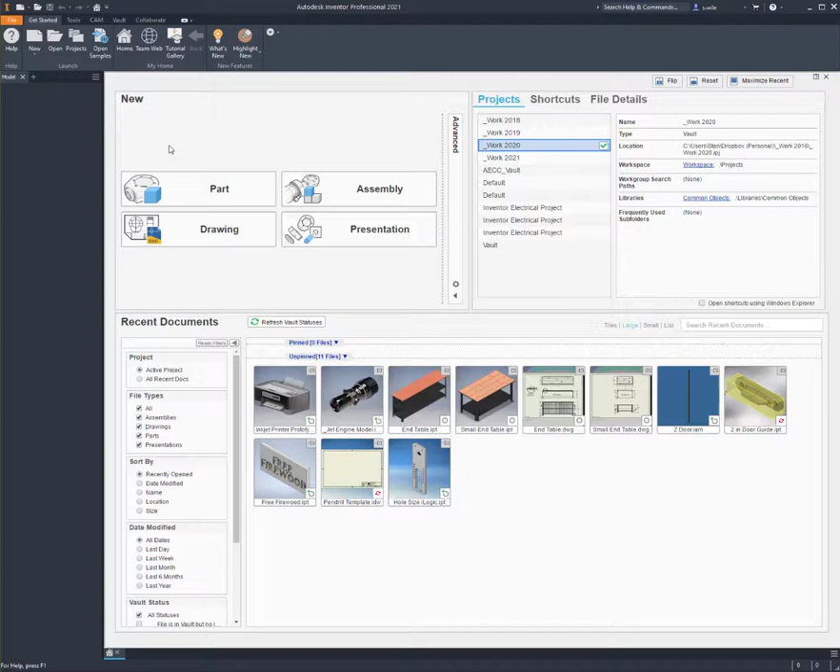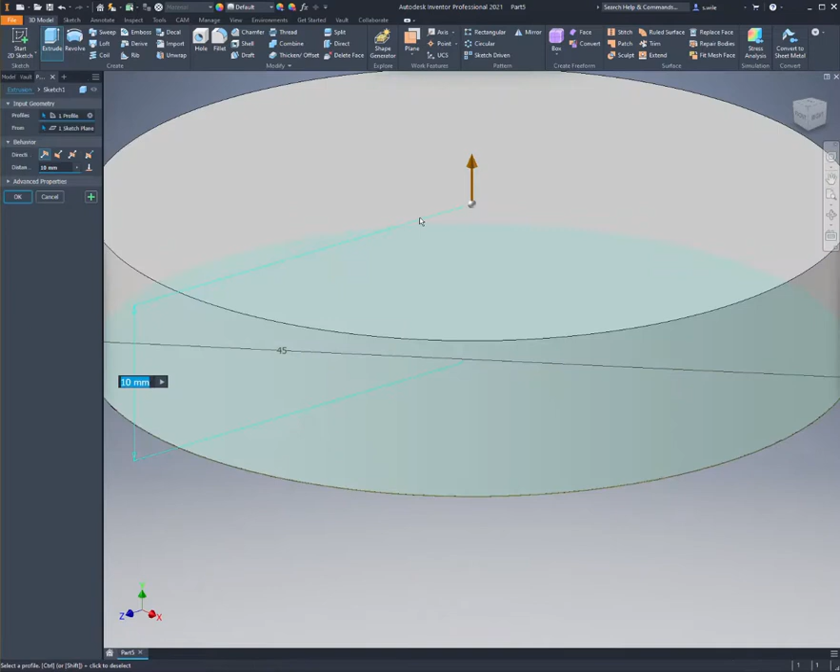We'll start with a metric part. And I'll start with the main hub as my base feature. It's 50. And then we'll do the little horseshoe clamp because it looks like it's on the same plane.

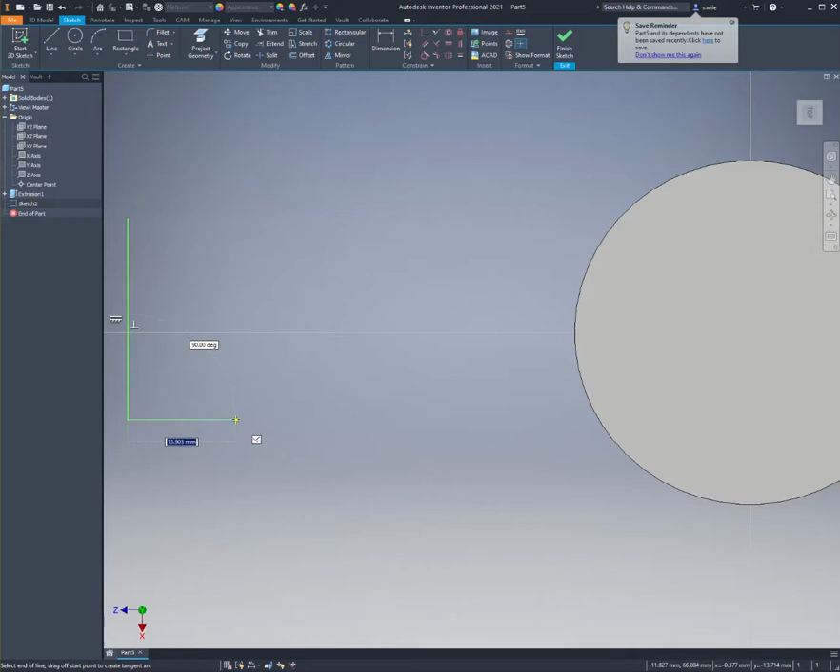I'll just do it as a line. A lot of ways you could do this. If you click and drag on an endpoint, the cursor turns gray when you click on it, and then that turns it into an arc. So this is 35, it looks like.

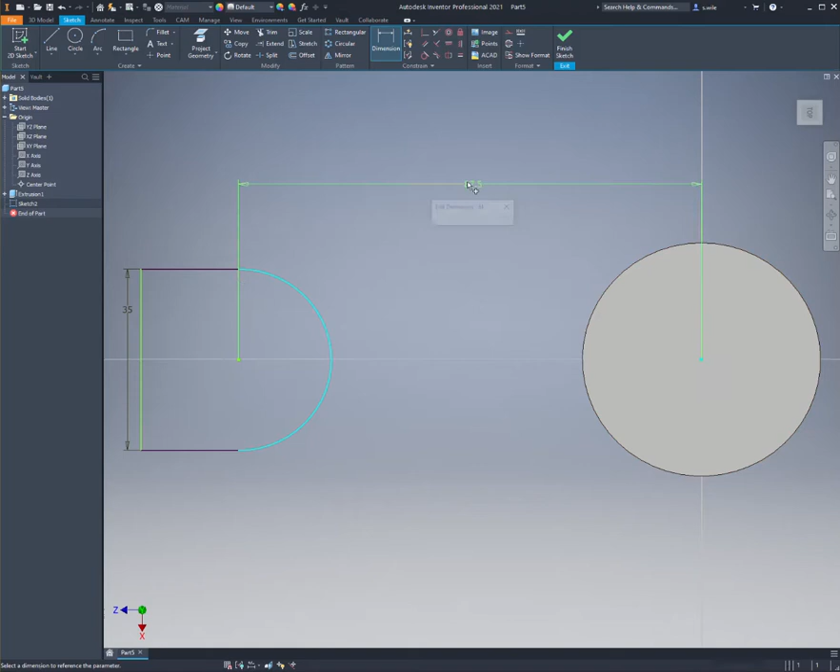I'm going to horizontally align these two and then set the spacing. And that is 20 high. And we'll put the holes in this, I guess, next. Let's fill in the rest of the body. So the piece that goes across the middle here looks like they give us a 35 off the top.

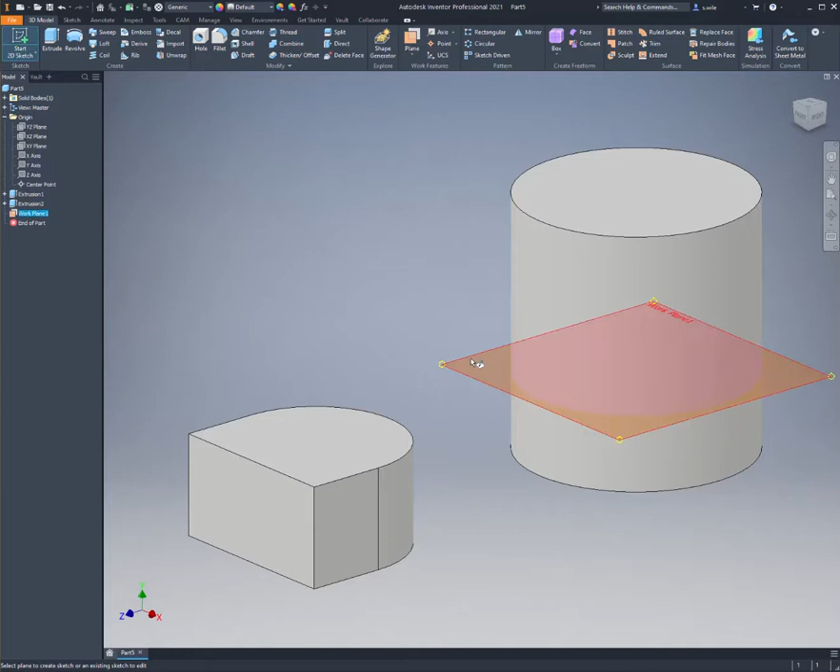So let's pull a work plane -35 and we'll put a sketch on that. And I'm just going to project cut edges here. And then F7 or this button will slice your graphics so you can see where you're working. And it looks like it just goes to the end to tangent.

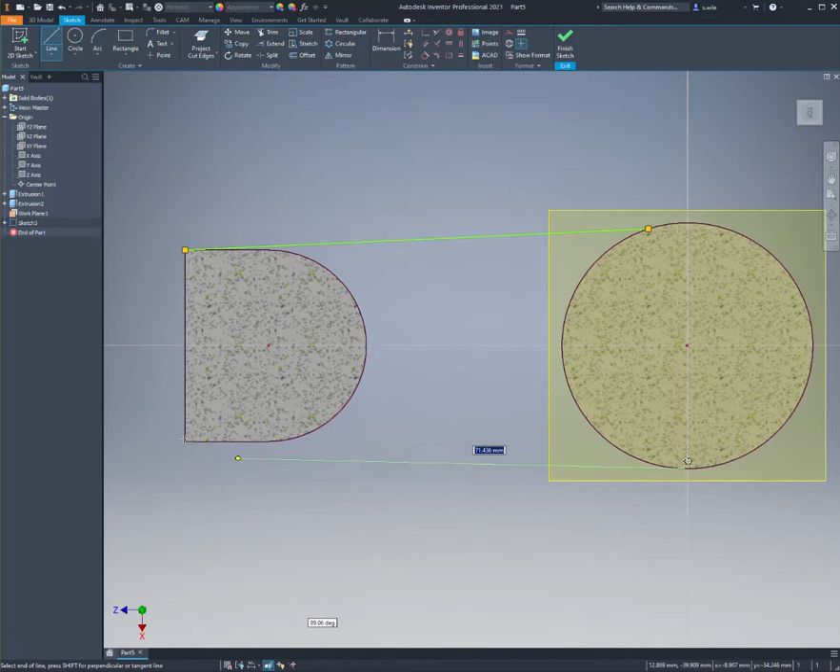And a little trick here, if you start on a circle, if you hold shift, it locks it to tangent. And something's wrong with my computer because it's jumping all over the place. But that gave me my tangency and my endpoint instead of having to come back and follow up with a tangent. That's a closed profile in the middle, so we can extrude that. That's going to go down 10.

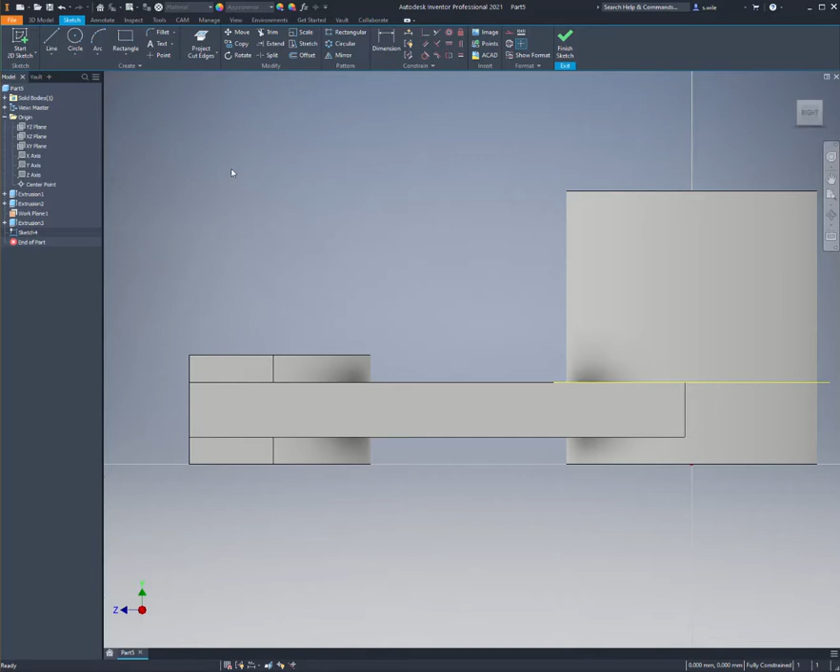I'll put the rib in the middle next. It looks like it's 1 millimeter off the top. So we'll put a sketch in the middle, and I don't think I'm going to project cut edges. I am going to slice my graphics. I think I'm just going to project that and that to pull off of. Let's go right to the top.

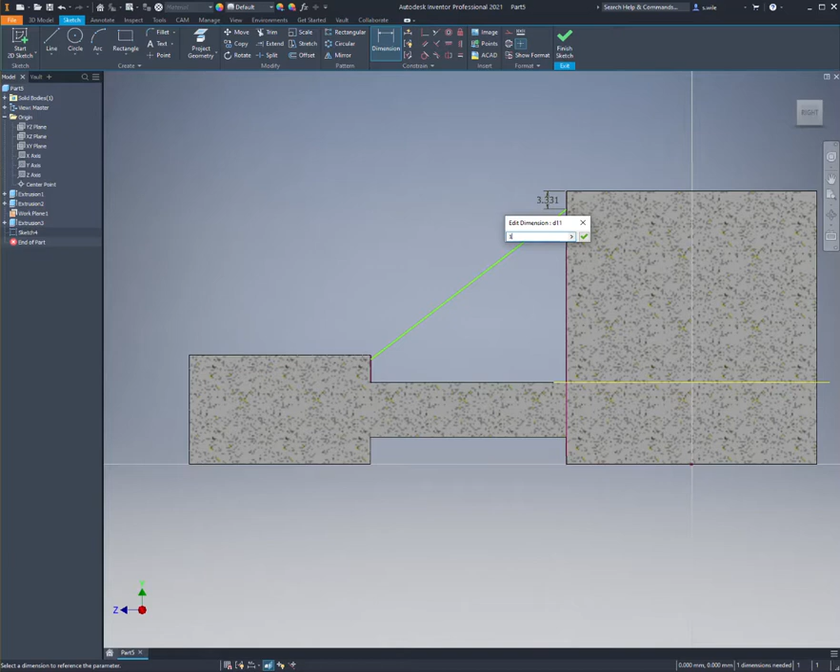Now it doesn't really show. This one says it's 1 millimeter off, but it doesn't show. Maybe it's 1 millimeter here too. Let's see what that looks like. I'm going to use the rib function for that. I want to go down and fill in a solid rib. And that is 10.

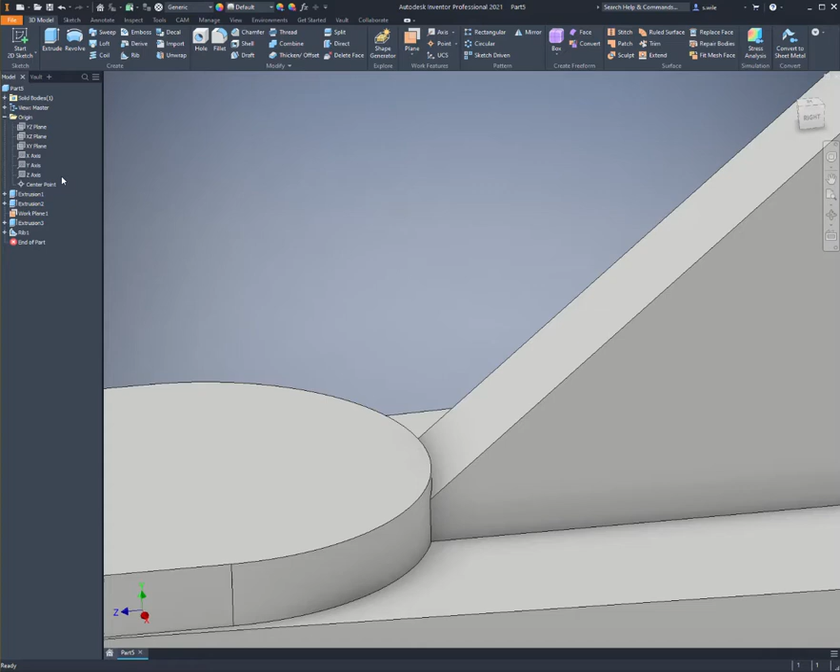Let's look at that. That could be right. I'm going to guess it actually comes up and is normal. So let's try editing this sketch again. And I'm just going to bring that all the way up. Let's see what that looks like. Yeah, that's probably what they're trying to show there.

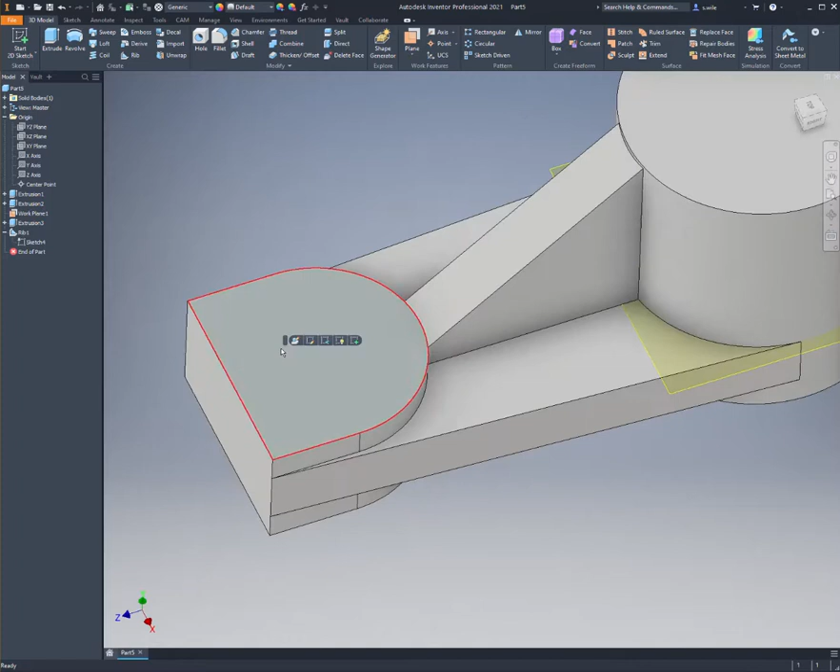Put our two cutouts. There's a notch out of here. You could put a sketch on it and do an offset. Quite frankly, I probably would just draw it again. Let's do an offset. Let's project the face, and when you start the offset, it wants to offset everything. So start offset and right click and turn off loop. Then you can pick what you want for your loop to do your offset.

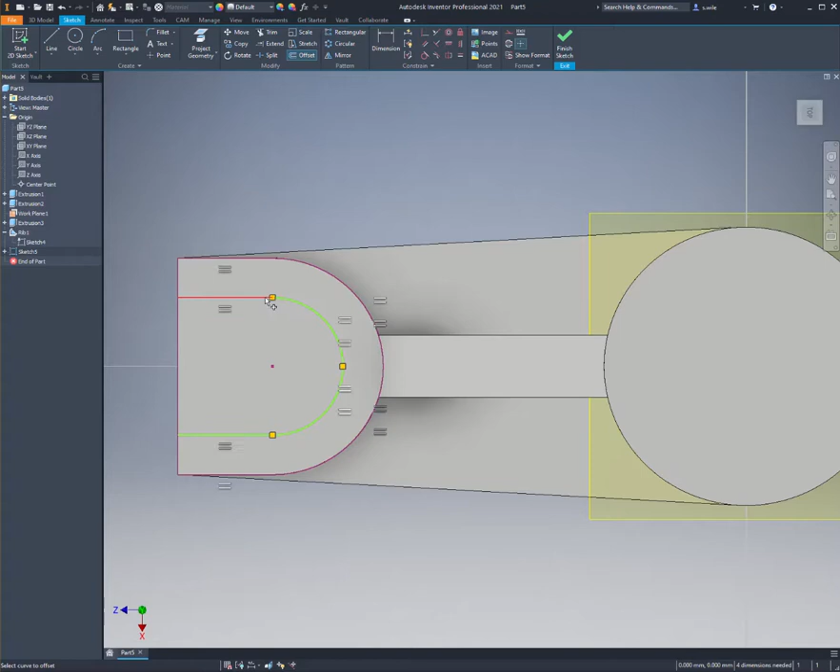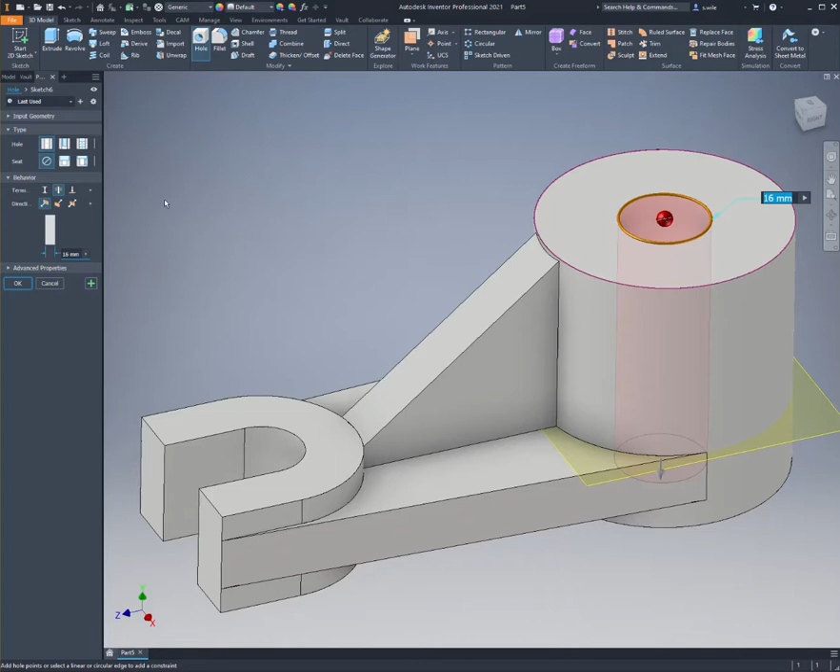And this is 15. It's probably not how I would have done that for real. I probably would have drawn 3 lines, just trying to show a couple different things. Flip down, put a hole down the middle. So I'll just do, you pick anything round, it does a concentric hole. 16, looks like that is 8 times 2. And let's turn this work plane's visibility off.

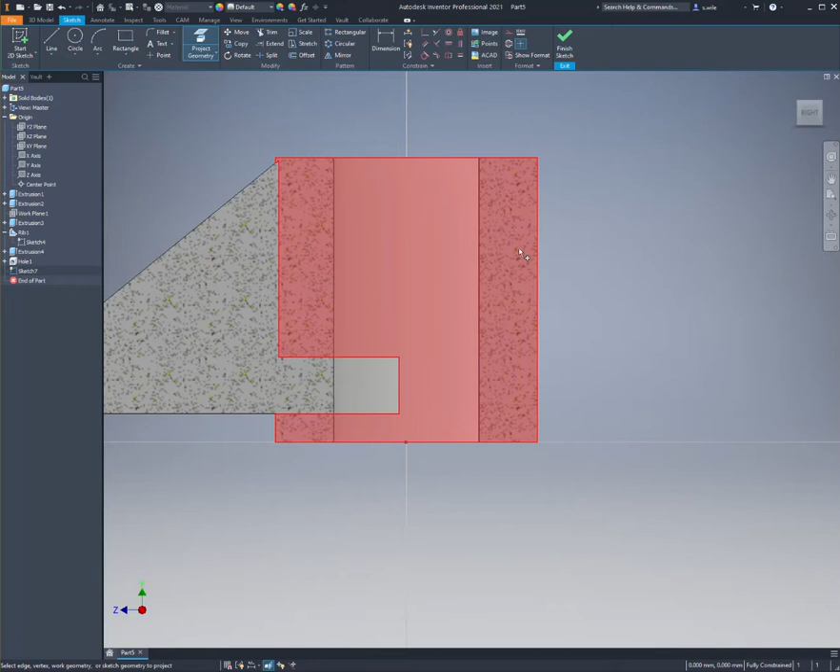And I'm going to draw this from the inside, because if I draw it from the outside, when I extrude it, I'm going to have a little pie-shaped wedge of missing area, solid. And I'll just do this. Let's do a circle this time, do it different. So a circle and 2 lines. Might have to come back and add a tangency to those.

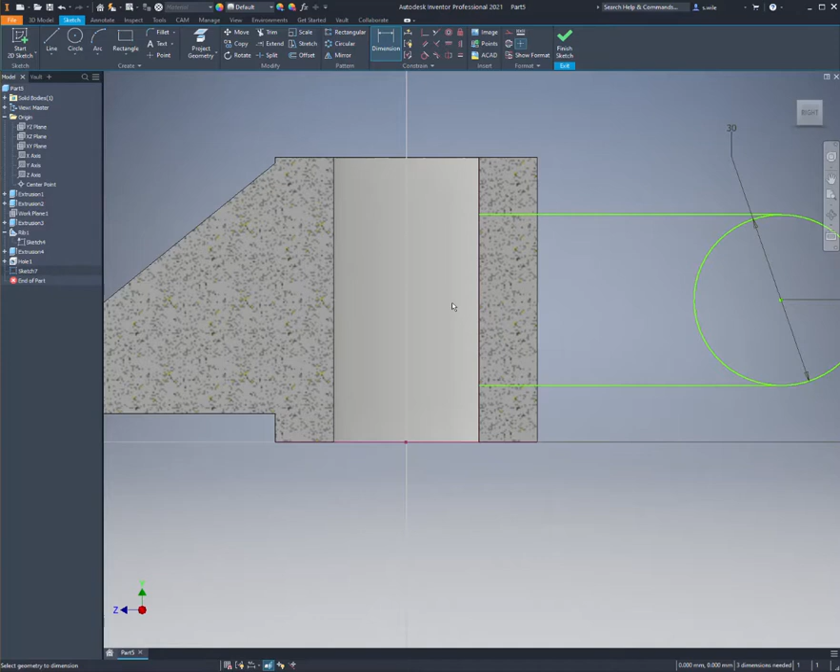So this is 15. Yeah, I think that's 15. So this is a diameter of 30. And it is 25 off the top and 35 between centers. And so I still have some green. Get your sketches fully constrained. All right, and let's extrude that both directions.

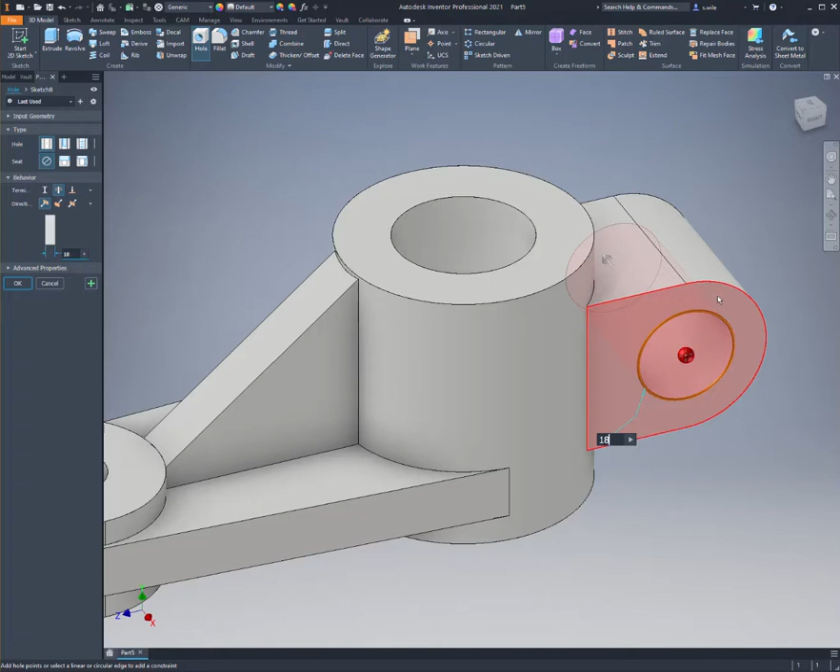Looks like it is 13 plus 13 plus 5. And then there's a, is that an 18? I can't read it. I printed this out and I can't read it. The hole through here is either a 16 or an 18. That actually, 18 looks right. Then we need the slot cut out of there so that it tightens on the shaft when this gets bolted down.

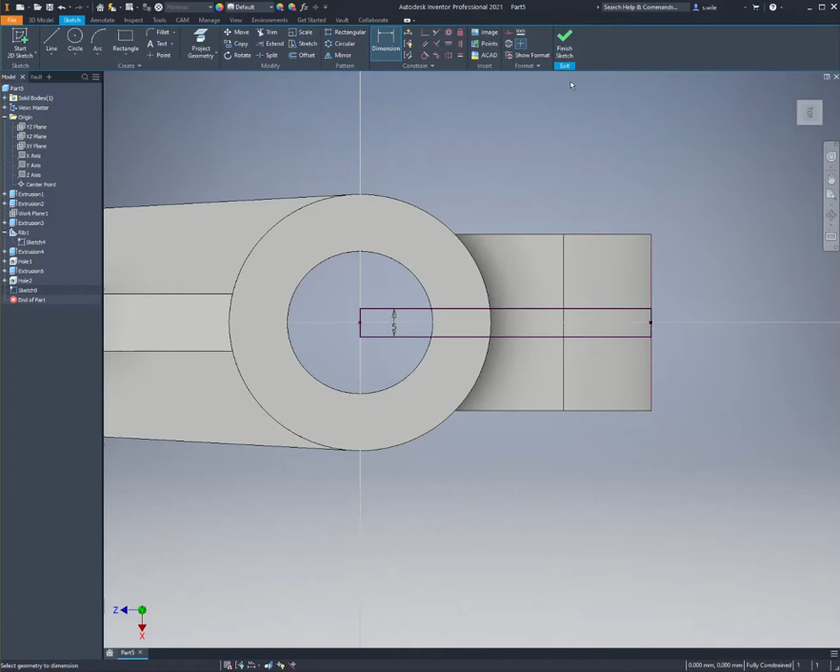I think I'll project the back side and just do rectangle. Coincident constraint from midpoint to midpoint, and I meant to pick the midpoint, but it doesn't really matter because I did on the other side. And we'll extrude through all as a cut. And I might have missed something, but I think that is your part for number 1.

Number 2. I don't think I have time to do number 2. I'll do it as a separate video in a couple hours.